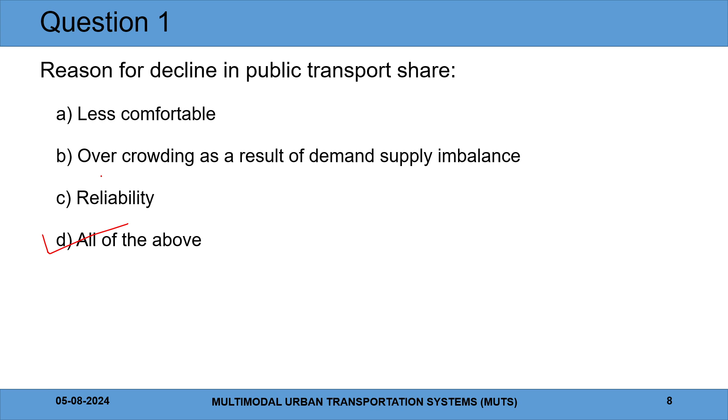There are also problems like overcrowding, privacy, and reliability issues. This makes the decline in public transport share. So all these answers - less comfortable, overcrowding, reliability - all are correct here.

Next question: identify the true statement from the following. Improved road condition increases public transport ridership. Second statement: societal status is a reason for shifting to private transport.

You can post the answer in the chat box. Then I will discuss that. You have to identify the true statement - that improved road condition, whether it increases public transport ridership, and the second statement, societal status is a reason for shifting to private transport.

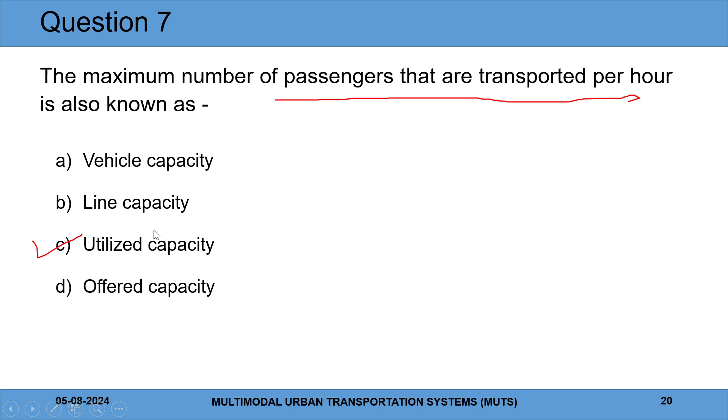It can be for public transportation, like bus or train, any public transportation, even metro rail. In case of bus, generally same terminologies are used for the different types of transportation.

Yes, for metro, generally the same terminologies are used, and that's why this transit unit is fixed. The transit unit can be train, or it can be bus. There are different types of bus, so in general it is said as transit unit.

But the terminology is the same for this kind of stops line. It may be for metro line. You may have seen that for metro line, even for train or bus transport, these type of lines are also there.

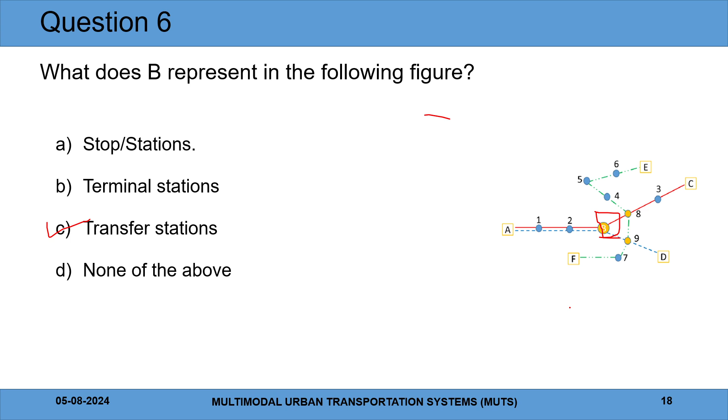This transfer station actually exists because if you want to go from A to F, from A there are two buses: one going from A to D, one going from A to C, and there is a bus coming from E to F. You have to board either the bus A to D or A to C, then get down at 8 or 9.

There is also a bus going from here to here, so you can board either bus, and since you want to go to F, you can get down at 8 or 9 and get another bus which is going from E to F. This E to F bus passes through 8 and 9 and also goes to F, so you can get down and transfer to another bus going in that direction.

That's why these stations are called transfer stations. At 8 here, you can get another bus of a different route, and here also you can get another bus of a different route. So at least two routes are connected at this station, which is why these are called transfer stations.

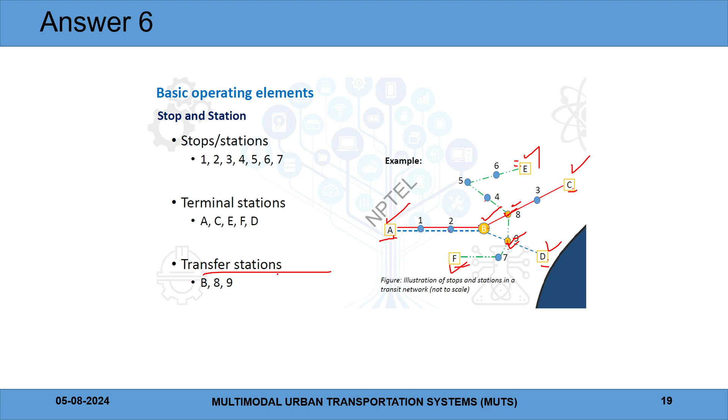Okay, so coming to the next question: the time interval between transit units' departure from two adjacent stations is...

It is actually station to station travel time. The running time is the time interval between a transit unit starting from one station and stopping at the next one, so that is the running time.

Dwell time is the time duration a transit unit spends standing at a station while boarding and alighting passengers. And station to station travel time is the time interval between a transit unit's departure from two adjacent stations, so option C is the correct answer here.

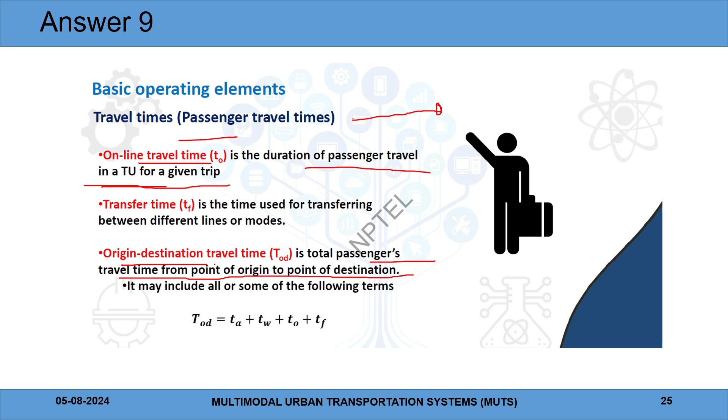So here it is the online travel time, which is the duration of passenger travel in a transit unit for a given trip. So option B is the correct answer here.

Next is, what does one mean by running speed? Is it the speed of travel offered to public, the average speed of a transit unit for a complete round trip on a line, the average speed transit unit achieves from leaving one station to arriving at next one, or the speed transit vehicles can operate meeting standards of safety, comfort, economy, and performance? What is meant by running speed?

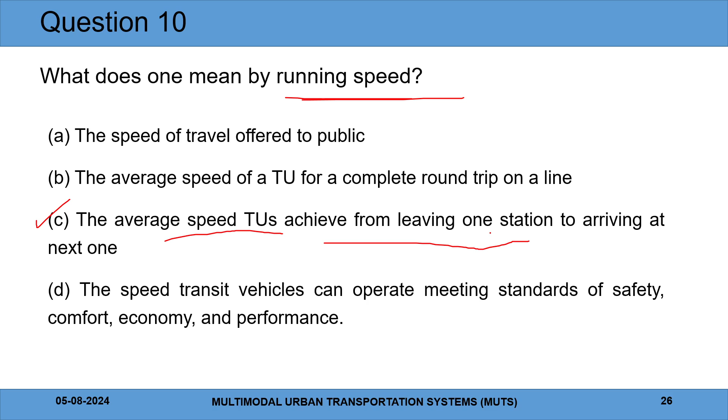Operating or travel speed is the average speed of a transit unit travelling along the transit line. Cycle speed is the average speed of a transit unit for a complete round trip on a line. There are other speeds like programmed speed, and running speed is the average speed a transit unit achieves from leaving one station to arriving at the next. So running speed is the average speed of a transit unit achieved from leaving one station to arriving at the next one, meaning option C is the correct answer here.

Next is, which type of bus stop placement and bus stop design is shown in the figure? Options for placement are far side, near side, mid block, or grid pattern. For design, options are curb side, queue jumper, or curb side. So there are two questions: bus stop placement and bus stop design.

For bus stop placement we have far side, near side, or mid block. Mid block is just in between, not at the intersection — it is between two intersections. For far side, if you consider this intersection, the bus stops immediately after passing through it. So a bus is going, and just after passing the intersection, the bus stands here — that is the far side bus stop.

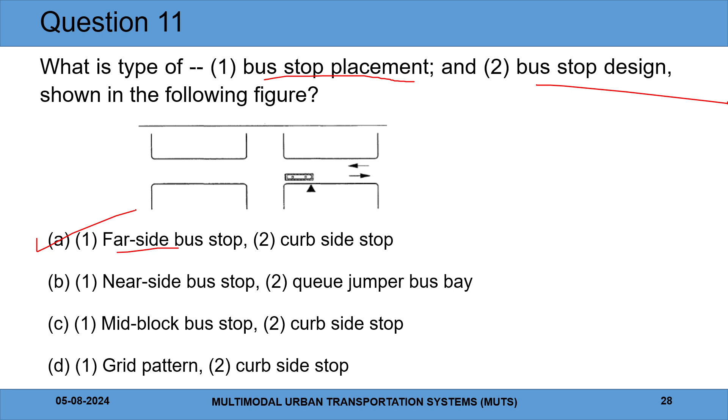Near side is when the bus stops before passing the intersection — that is the near side bus stop. Here, the bus is standing after crossing the intersection, so it is a far side intersection stop. It is also on the curb side, so option A will be the correct answer: far side and curb side bus stop.

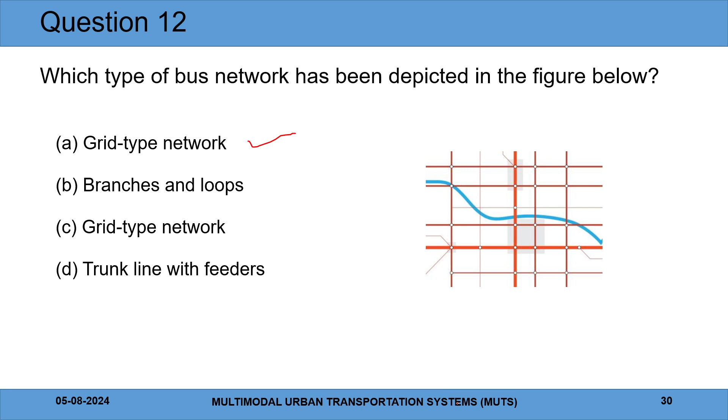There are different other types of networks. This is the grid pattern, and there are also radial or ring patterns — you can see ring-like roads, and routes radiating from the center, so that's radial and ring pattern. Other types include trunk or feeder systems, where this is the main route and there are other stops in branch loops — this is called the trunk and feeder system. So here, grid type is the correct answer.

Which of the following is an operation performance indicator? Options are fare box ratio, passenger waiting time, staff bus ratio, or affordability.

For operation performance indicators, we have studied different indicators like passenger volume, fleet utilization, breakdown, fuel consumption, staff bus ratio, accident rate, etc. So here, staff bus ratio is the operation performance indicator.

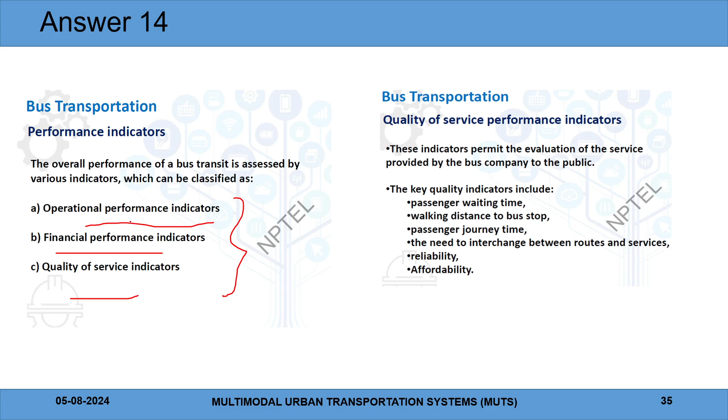Next is, what type of performance is measured by operating ratio? It is not operation performance indicator, it is operating ratio. And what does operating ratio mean? It is the total revenue by total cost. Operating ratio means the total revenue to total cost.

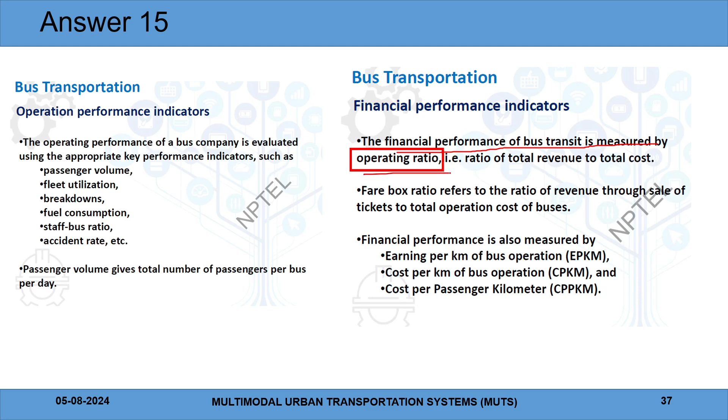Then you can see that it is more related to revenue, cost, these things. So it must be more related to the financial thing. So the financial performance of bus transit is measured by operating ratio, which is the ratio of total revenue to total cost. So it will be option B.

Line length of the given transit network: A to C is 10 kilometer, A to B, this small distance, is 5 kilometer, then from A to D it is 8 kilometer, and E to F it is 12 kilometer. So you have to calculate the total route length and network length. You can take some time, then calculate.

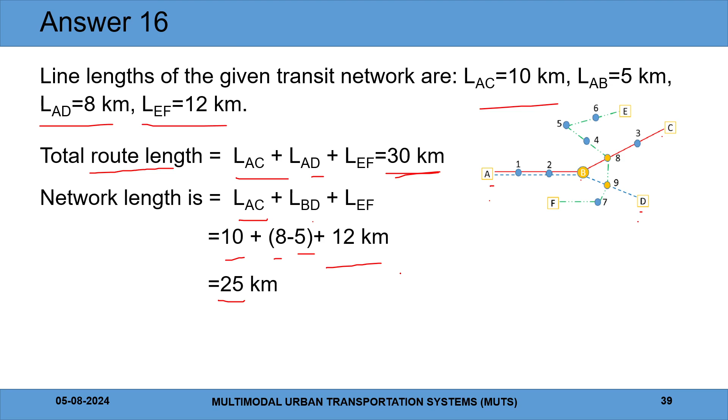Next question. Category C of transit right of way: A, longitudinally separated from other traffic; B, a surface street with mixed traffic; C, fully controlled right of way without grade crossing; and D, none of the above. Okay.

Transit right of way is the land on which the transit line operates. So it has different categories A, B, and C. Now in this question they are asking which is the correct explanation of category C of transit right of way.

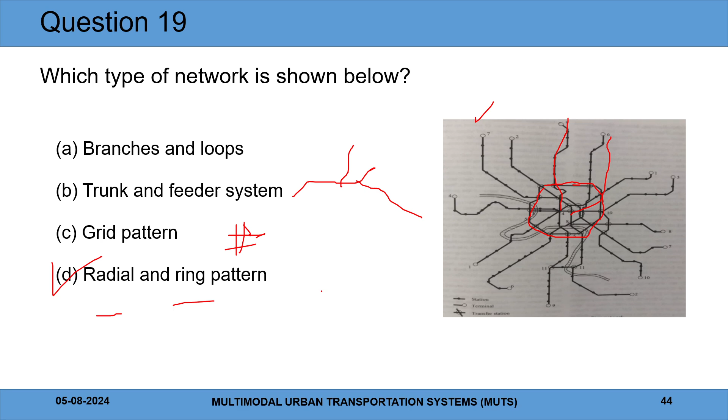This is an accept or reject statement. As the headway increases, frequency of a transit unit also increases. Accept or reject. Right, B is the correct answer. Headway is basically the difference between two vehicles. It may be time or space. So if the distance between two vehicles increases, the frequency decreases.

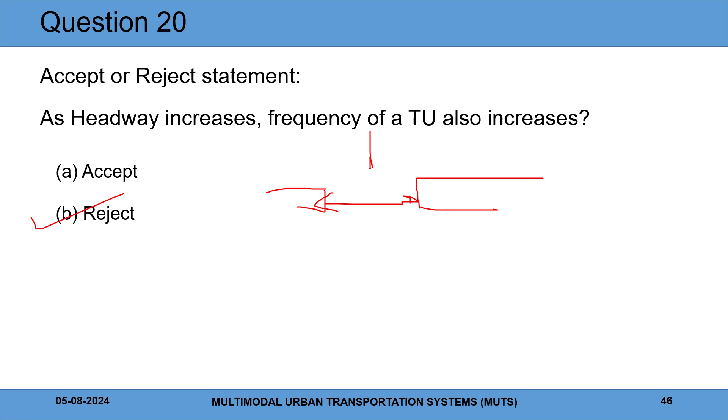So in this slide, we discussed that the number of transit units passing a point on a transit line in one direction during 1 hour represents frequency of service, like how frequently the vehicles or transit units are coming. It may be bus or train, and it is inversely related to headway. If the headway is increased, the frequency will be less, and if the headway decreases, the frequency will increase. So the statement will be rejected. So these are all the answers.

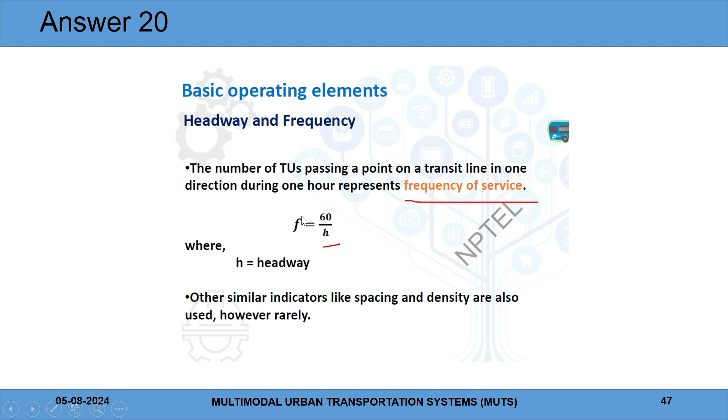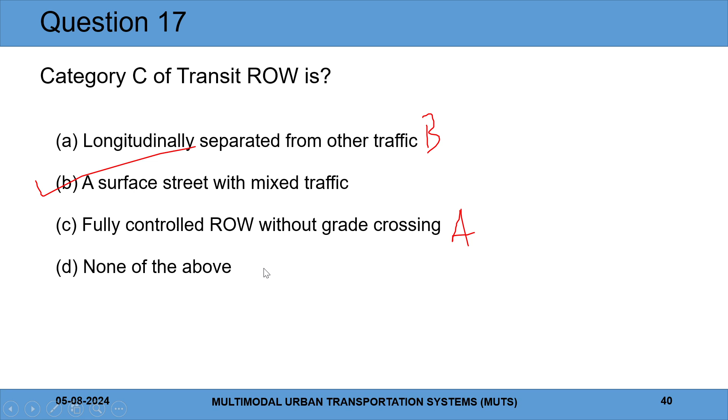If there is a crossing and it is fully controlled, like a kind of level crossing, people cannot cross that line. In general, metro lines are made totally segregated, like underground or elevated, so that's why it is saying that it is fully controlled. But if there is a situation that people must cross that line, then in that case there is a level crossing or it is totally guarded. That's why it is fully controlled.